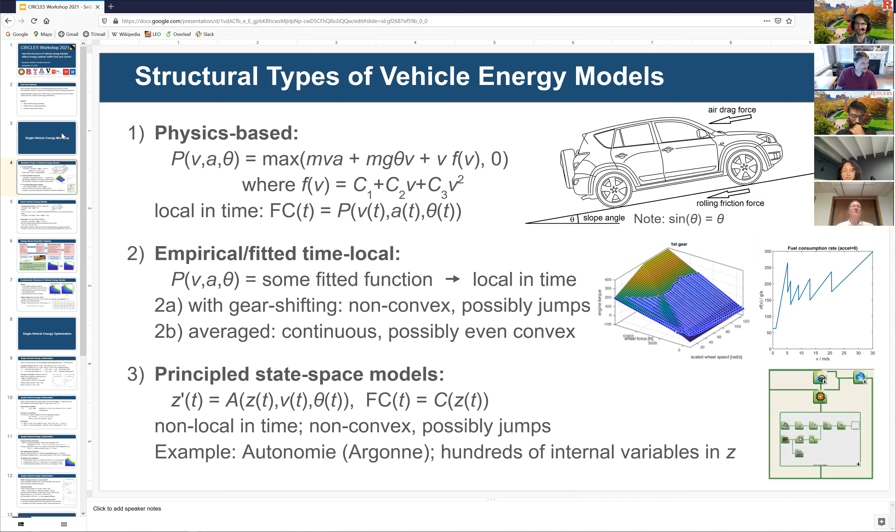And a vehicle is really characterized by a driver model, an environmental model here, but then also lots of internal components. It might be a little small to see, but lots of components that characterize everything that's in a vehicle essentially under the hood in there. So this is sort of the classes of models.

And if one wants to start on the first type of model, namely modeling the physics, then one would start out by saying, okay, I have a force to overcome here. So the vehicle needs to overcome a force. If not, it will be slowed down accordingly, right? So the vehicle engine outputs a forward force, but it's facing a resistance force.

And that resistance force is essentially whatever force you need to accelerate yourself, plus whatever force you need to overcome to go uphill, could be negative, of course, if you're going downhill, plus whatever additional friction you're facing. And that friction then, again, you could model in a principled fashion, for example, by saying that I have a friction force component that's proportional to the velocity squared. That would be the turbulence air drag, and the air drag coefficient would be a fundamental parameter of the vehicle.

But then also involving linear and constant effects which can model rolling friction of the tires. That's usually proportional to V. There's some laminar air drag components. There's some internal friction of components. Some could be constant, so that this can be absorbed into these terms. So one can see this polynomial approach as something where, of course, you use a polynomial if you know nothing else, right? But you could also see it as actually representing physical effects to leading order.

So this is the force that's acting on a vehicle. And if you're traveling a certain distance overcoming a given force, then if you multiply the force by the distance traveled, you get the work. And if you divide this by the time it took, then you get the power. And therefore the power is the product of the force with the velocity. And therefore you get this whole expression up here multiplied by the velocity V. So that's sort of the basic ingredient.

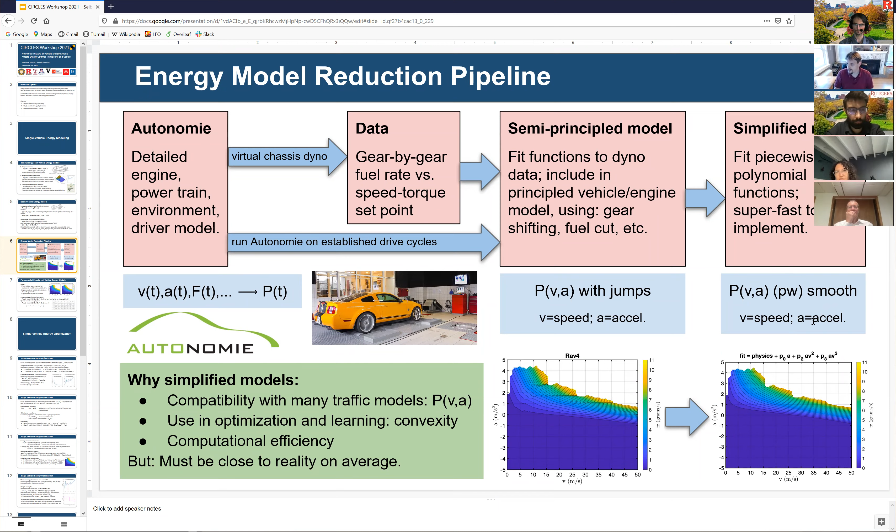And then this gets fitted as a last step by a simplified model that then is continuous and convex. So you see here that these jumps that are present in this model due to gear shifting get replaced by a smooth convex up function. And this is a toolbox. Of course, you could use energy models at any of these hierarchy levels, but if you want to do optimization, we generally advise to use those here, which I hope I can highlight in 2 slides.

So again, to recap, the true vehicle energy, as well as the Autonomie, is non-local in time. The idea is to approximate it first by something that's local in time, but incorporating gear shifts and other effects, and then to approximate it by a convex function that yields these behaviors here that are still as close as possible to the model with gear shifts, but essentially average over them. And Noor provided some interpretation and rationalization for this.

So this is on the energy modeling, recapping again what we saw before. But now the question is, okay, when you have these different types of models and different structures, what does this now mean for conducting energy optimization? So again, we look at a single vehicle.

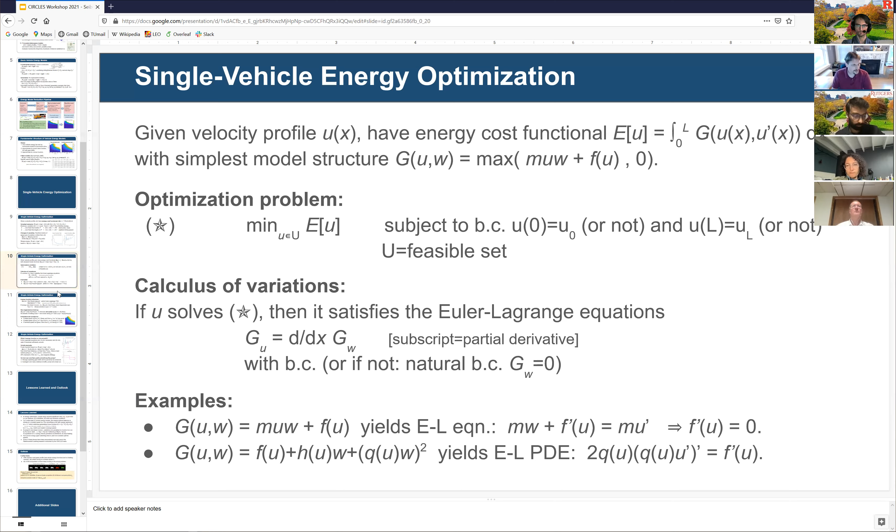And again, you sort of get what you ask for when you optimize energy. So this is the Euler-Lagrange equation, the second order PDE, or in that case where the energy is only linear in the acceleration, then you get this degenerate equation, as we said here. And now you have to ask what do the solutions look like and exhibit? So without covering all the details, you also need to look at what happens when you have non-regenerative braking.

So if energy is lost when this function here becomes negative, this means essentially that you don't allow it to be negative. You have a region then where it's 0, and the boundary of that region is essentially the curve corresponding to the edge of having positive power versus 0 power. That is exactly corresponding to taking your foot off the pedal and then coasting slowly towards 0, but not wasting fuel by braking. So, in some sense, you could call that the 0 pedal curve.

And that 0 pedal curve is exactly then parametrized in the UW space. Again, remember, W plays the role of an acceleration, just being a function of x rather than a function of t, right? And this is just this function here. And if you therefore want to move down along this zero pedal coasting, so going down to zero speed without braking, then your speed profile would exactly be given by this zero pedal ODE. That's essentially given by this right-hand side. So that's how you would slow down.

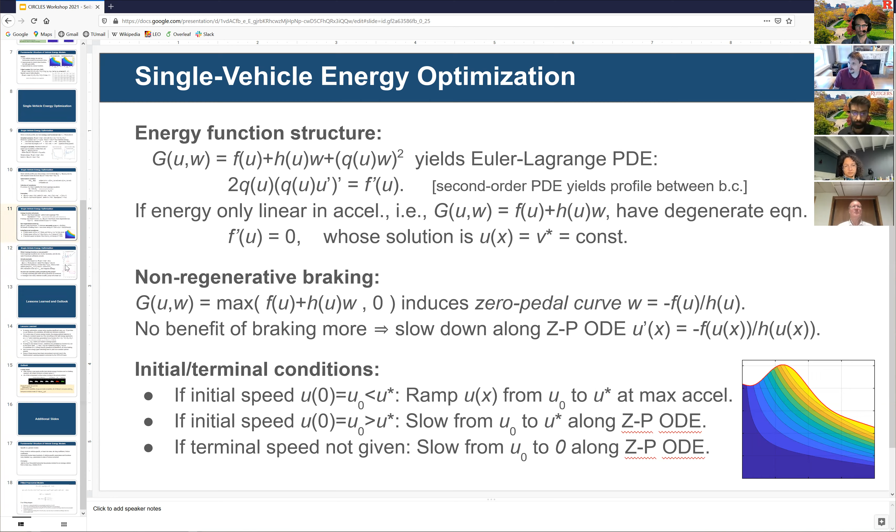And if you want to avoid this, you have to actively work against it and design your problem so that this does not happen. Okay, so there's a lot of really interesting structure in these problems. And the last point to be made here is that the problem with smooth energy functions already is quite interesting to look at on a single vehicle.

Now, what if you were to use an energy function that's non-smooth, for example, one that has these jumps due to gear shifting? Then again, first statement, of course: the Euler-Lagrange equations, don't use them for such a case. First of all, they're only necessary anyways. But second, they're only valid if your functional is sufficiently smooth. So then it makes sense to look more directly at the power function. Don't invoke the calculus of variations, just look at the structure.

So it's v times v dot. So that's just the derivative of v squared, right? So therefore, the first term, the acceleration-based term, just integrates completely to being the difference of the velocity squared at the final time minus the velocity squared at the initial time. And all that matters for your energy actually is the time integral over this v-dependent part, right? Where you are in the velocity space.

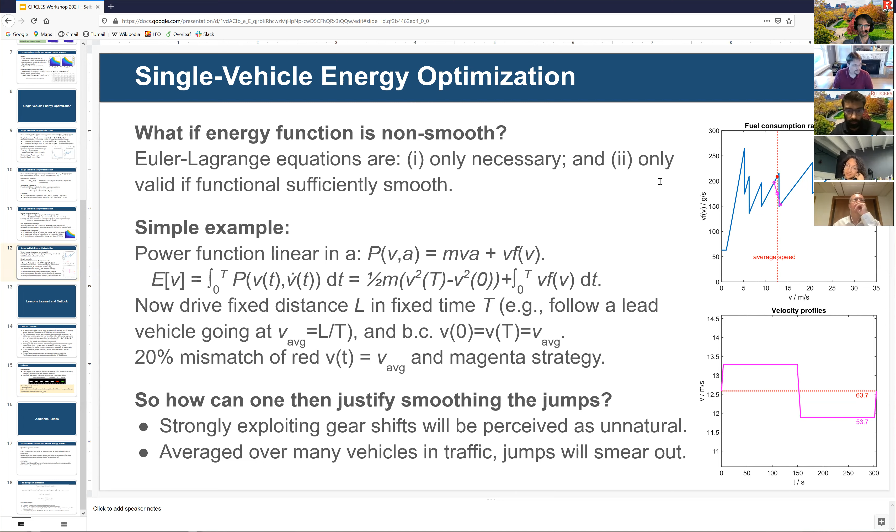Now, very quickly, lessons learned, right? So in energy optimization, with the proper setup one has to be very careful: time versus distance in the denominator, what the constraints are in the terminal and initial conditions. But for a wide class of convex energy functions, in fact, the energy optimal trajectory is driving at constant speed, but not always. Okay, so one has to be careful. But that means that smoothing would be the right energy approach as well. You see it here written down, right? Depending on the setup, there are different scenarios.

Another important message: if the energy is only linear in acceleration, then the variations in velocity are only penalized by the function f itself, not by the acceleration, as long as you don't brake. If you brake, of course, then you lose a lot of energy due to that effect as well. But that's another interesting fact. With a non-convex energy, one can easily construct examples where you get non-constant optimal speeds. And many of these issues have been seen by setting up the reinforcement learning procedures and looking at them.

And the final comment I want to make is that, well, you see the non-zero road grade. I don't need to say this. So what's important is that all of this is the single vehicle so far. And again, we need to remind ourselves what's the actual problem. So we do that in a forward fashion. We mostly want to smooth waves, but strictly speaking, if I wanted to set this up, this I would say would be sort of the model problem.

And it resembles a little bit what the RL team has been doing lately, right? You have your AV, but it has a lead car in front of it. And then you have an immediate follower of the AV and other followers behind. Those are the human cars. And you want to choose your AV speed such that the energy of all the followers is minimized collectively, subject to, A, the capabilities of the AVs, B, that the gap to its leader remains acceptable, whatever that means, and C, that the annoyance function A of the AV's immediate follower stays below a critical threshold.

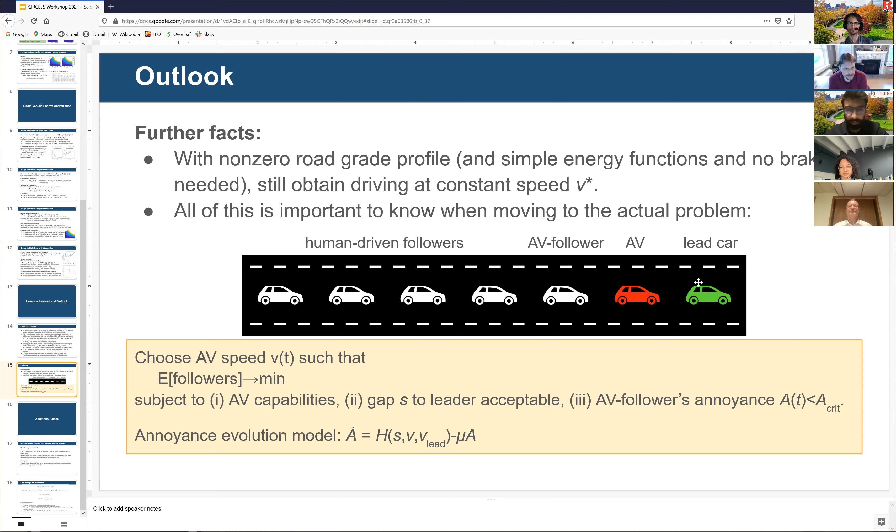I have a quick question about the slide right before. What you said about the contribution of acceleration to the energy means that if we had an energy function that is superlinear in the acceleration, if I understand correctly, even a perfect electric car that recuperates 100% of the braking will still be penalized by acceleration? Yes, that's exactly right. Okay, interesting. And the second derivative is exactly giving you the amount. But yes, in phase space, essentially you drive circles, right?

If you have a sine wave, it's ellipses in phase space that you move. And when you have linear in acceleration, but you are at a valley in the force or v part, then what penalizes your ellipses will be going left and right in the v direction. But in the a direction, it integrates out, by this expression here. And whenever you have a superlinear term in a, then this bowl shape, it's always bowl shapes that matter, so the bowl shape in the a direction would also add to the penalization.

But in the fitted models that we have on the earlier slides, we have a quadratic term in there. But sometimes the coefficients are comparatively small. So back of the envelope calculations actually indicate that if you have small amounts of variation where you don't brake, you're just going up and down by using the gas pedal, for example, then the loss due to acceleration being variable is in fact smaller than the loss effects due to velocity.

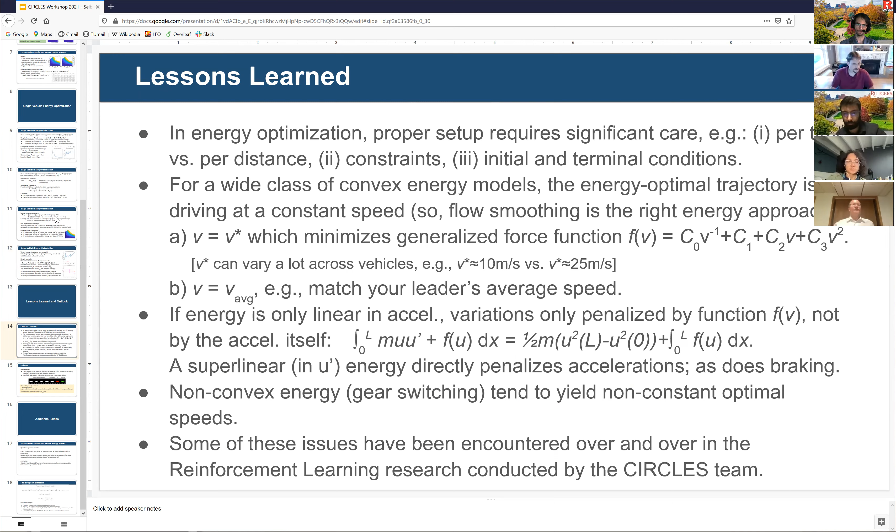Actually, I have a quick question, Benny. We talked about the power being linear with respect to acceleration, I think you showed. Yet we know that based on the complicated details of all of the different friction terms, there should be some sort of quadratic friction term in velocity. Does that mean that driving over the optimal speed is always worse than driving slightly under the optimal speed?

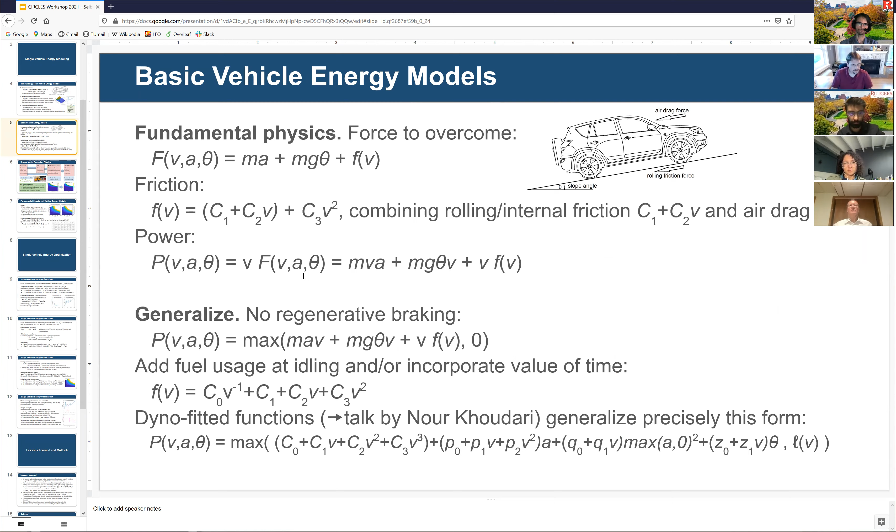How does acceleration come into that question? My sense is that one could think you'd penalize equally for driving a certain amount over the optimal speed as you would for driving under the optimal speed. But the asymmetry is that the friction terms are higher in the one case and lower in the other.

Well, first of all, in terms of the V terms, it depends on what these coefficients are that you get. So if you travel a fixed distance and you want to choose a velocity profile, you have the constant reference state, and then you have something that's variable. Whenever it's variable, is it non-optimal, so it has more energy than driving at a constant speed with the same average, or not? It also depends on whether you fix the time, fix the average speed, or leave that open.

But if you compare this with driving at V star, the optimal speed, which by the way sometimes is way too low for some vehicles, it depends on the vehicle, but sometimes you cannot drive at V star, it's just socially unacceptable. But if you are near that one, then if you go up and go down, which one is giving more? I think there's no general rule I could make based on what I've seen. It depends quite on what these coefficients are actually. Yeah. Sure. All right.